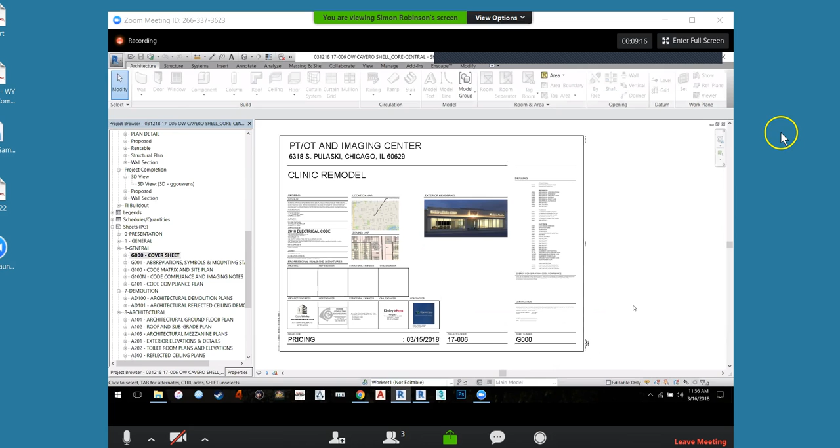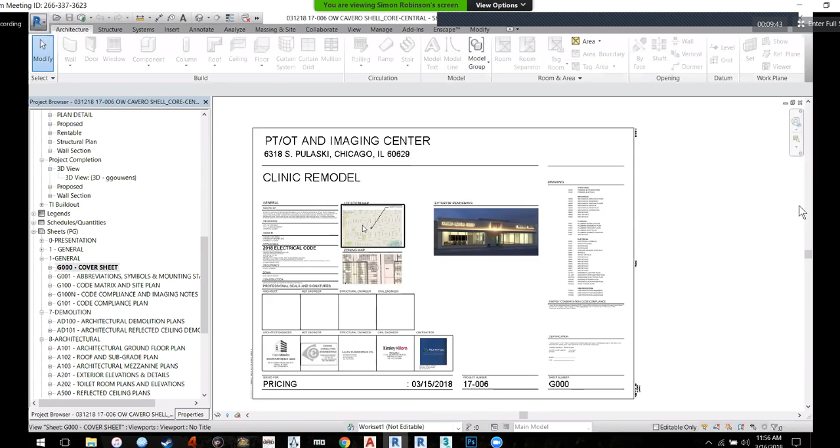We're showing a screen, and we're looking at the future in two senses. First, in healthcare, the world has moved to outpatient care, much closer to where people live. This is an example of a physician building an imaging center and physical therapy center on the south side of Chicago near his offices and patients, rather than having them treated in a hospital. The second sense of the future here is what you see: a conventional set of construction drawings, two-dimensional.

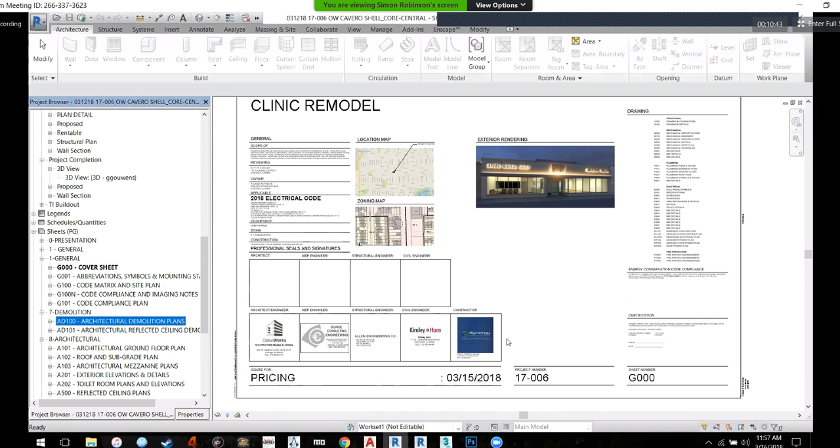Right now we're in a transitional world, between the world I was trained in—drawing in two dimensions, elevations, plans—and now, where technology has made it possible that while the product is two-dimensional, it actually comes from Simon building the building three-dimensionally in a digital world. We are moving toward a future where I'm certain there will be no more construction drawings, but the building will be built directly from the three-dimensional model.

But in the meantime, Simon is building the building in a three-dimensional model, generically called BIM, or Building Information Modeling, because it's not really drawing software—it's a graphic database. In other words, the lines are smart. They have information in them, not just a dumb line. That makes all kinds of possibilities available to us.

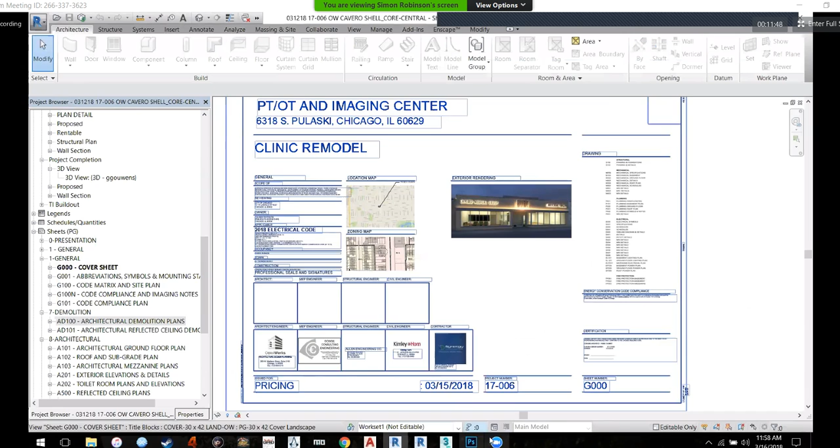We are leaders in what is possible with BIM—in this case, the brand name is Revit, and they own the market. We are thought leaders in what is possible with that. We still have to produce a conventional set of drawings though.

So let's go through some of the pages quickly—just the architectural ones. Let's go right to 101, the floor plan. So the conventional floor plan is the existing building—it's an old liquor store, and we're going to reuse the facade, split down the middle more or less. Big intensive imaging on the upper side, and open space on the bottom for the physical therapy area.

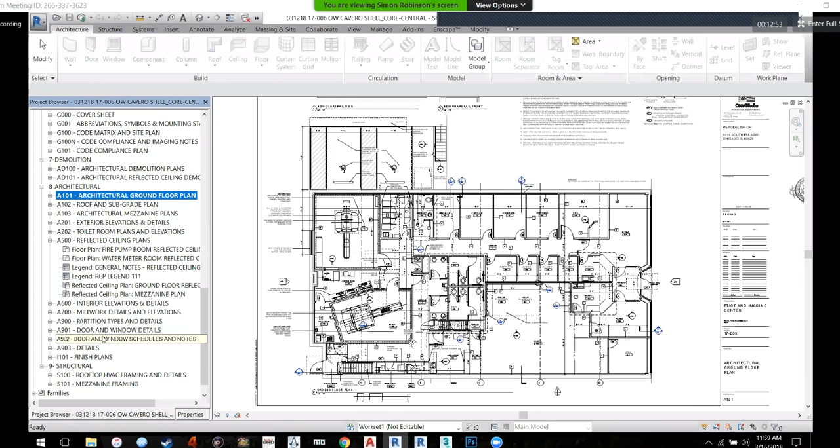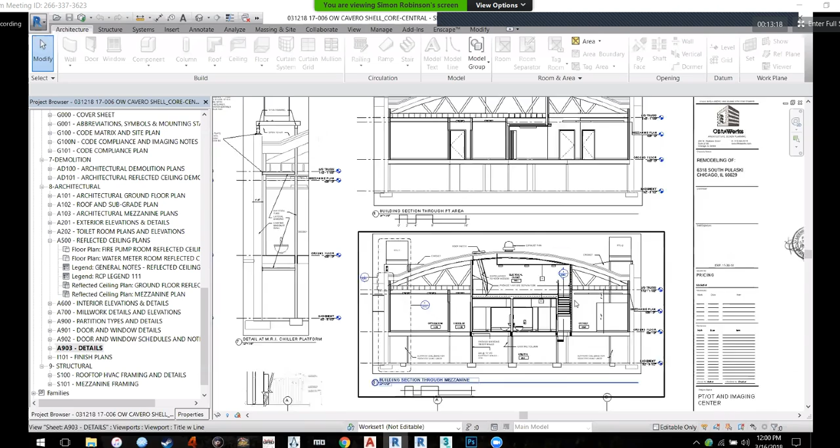Let's go to the sections—903, I believe. Even when I was hand drawing, we did a cross section through the building. What's great about drawing a building in three dimensions is you draw it once, and you can cut a slice anywhere you like, and it gives you accurate information. We're looking at the bottom level, the sub-grade basement, the main floor, and in the barrel roof we created a mezzanine space where we're putting the utilities.

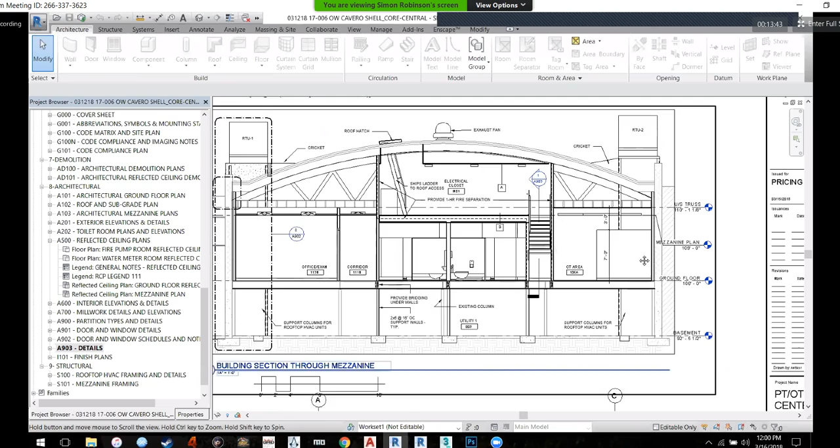Okay, let's go to the elevations. Because it's in three dimensions, I'm able to quickly put a circle around something and zoom right into it—it's already drawn. So let's go to the front elevation. Just conventional elevations. We're putting the mechanical on the rooftop for modern use. Go to the far right, show that roof detail.

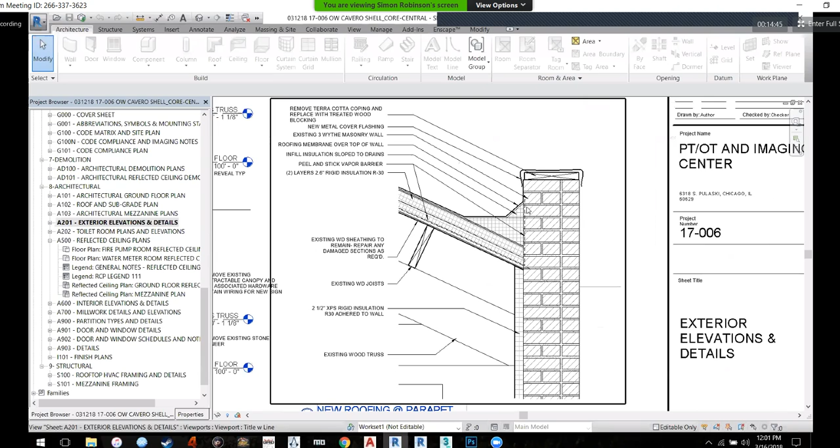So we're still doing details, and this is where we have to manage the new technology, because it gets so detailed it becomes a bit of a black hole. We have to decide how far to take the three-dimensionality of something. So now, Simon, I'd like you to go to the three-dimensional model that these pages are pulled from.

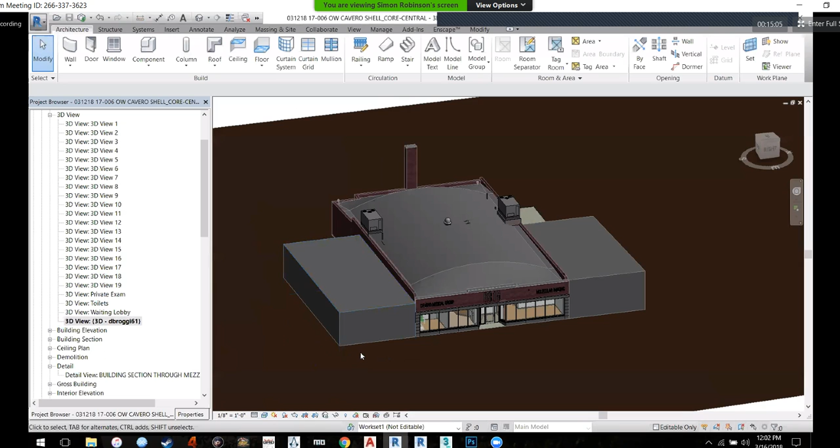Go ahead and talk about it. Well, basically, it's like you said, Frank—these aren't just lines, these are information. So if I select a wall here, this wall right here, it actually has data in it. This is a pretty simple wall right here.

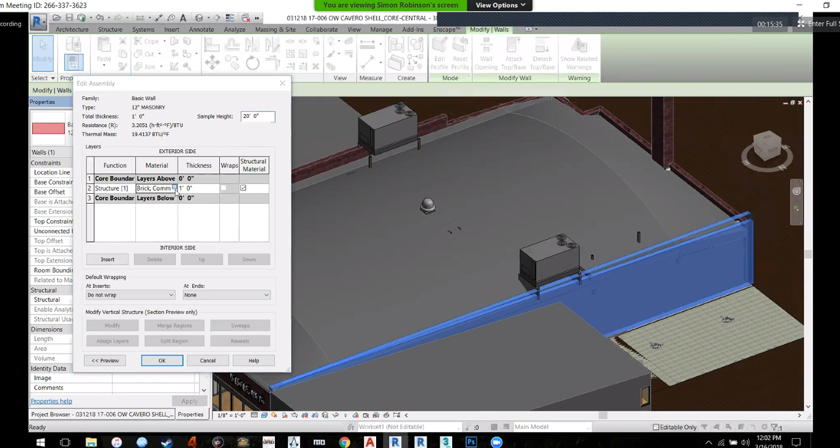However, the program knows that it's brick. All of these materials have attributes related to them—everything from textures for rendering to thermal information. This actually has the R-values and everything stored inside of it. So if you were to do an energy analysis of the model, it would take into account the R-values of the walls, which is pretty cool.

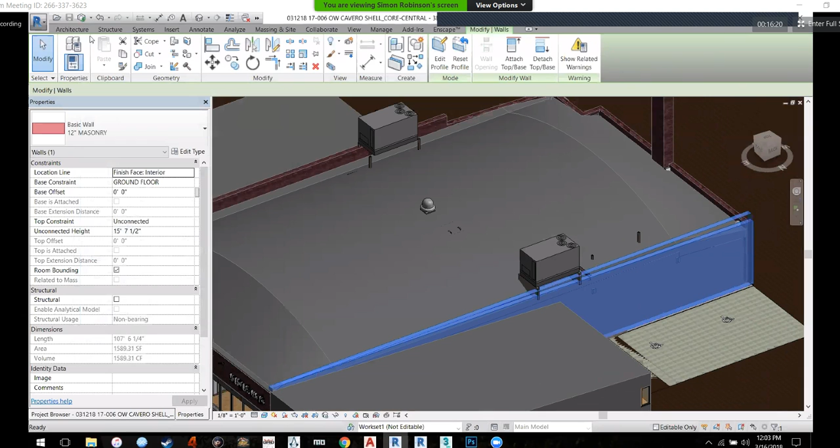So what that basically says is any information I want to assign to a given piece of the model—as long as I assign that information to every piece—it will give it back to me as a whole building value.

With that, for scheduling and basically all your data collection, you could assign data to each component, not just walls but anything from a toilet to a couch. You could put in the model, the manufacturer, even the cost, where you could buy it from, what the website is, and the type mark for tagging it so it knows which schedule it goes into.

Some interesting uses people are putting this to: contractors are using it for precise takeoffs of material, and owners of buildings are using it for managing their buildings. For example, you can click on a pump and it will say this is pump manufactured by X, model number, and they can say, okay, we last serviced it two years ago. Literally anything in the building, you can know something about it.

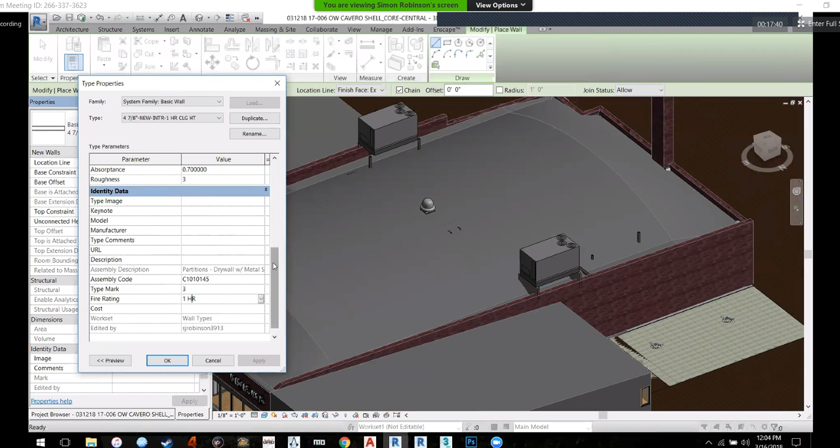Real quick thing about the walls too is that you actually construct them. This is a better example because that was just 12-inch masonry, but with this program you have to be very careful that you do things correctly the first time. Don't just put a wall down and assume it's the correct finish and thickness. If you want to take advantage of all the aspects of the program, you need to incorporate that right here. This is just your basic 1 hour 5-inch wall. Right now it says the structure is a metal stud layer. You can specify whether or not it has insulation inside, and from there you could add the gypsum wall board and the finish. It constructs that wall, and then it reveals the R value and thickness.

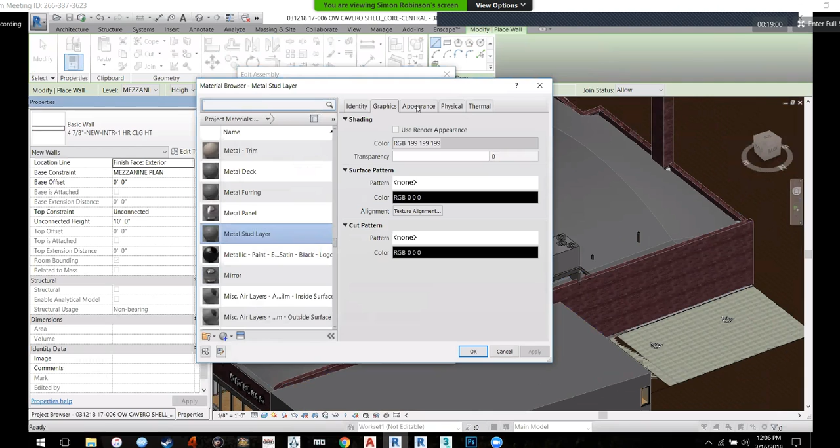Simon, I have a question for you. Yes. I've noticed that as you were able to pick selections, it had a visual. Is that how you assemble a rendering, by picking those visual attributes?

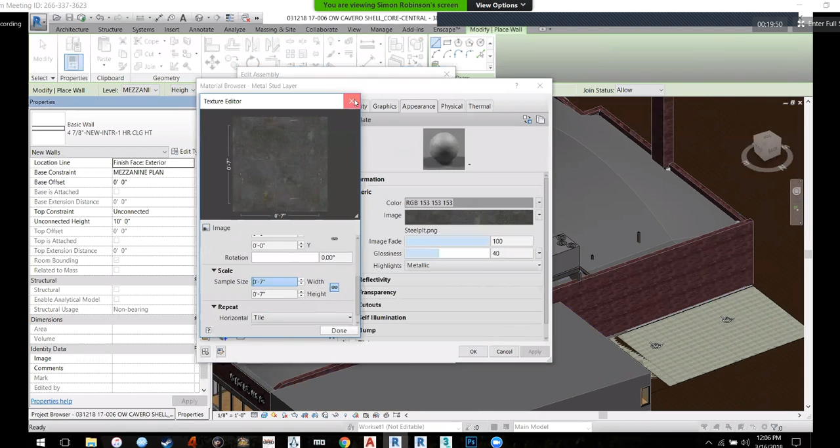Yeah, this is actually what Revit comes with, a library of images. So these will all show up rendered. What I actually do to create custom materials is you could create a new material, or take an existing one, and all you have to do is take any template, a JPEG, a PNG, get them off Google Images or anything, and assign that to it. Then you control the various aspects of it to make it look best. You can change the sample size, make it tiled, and there are a lot of little tweaks you do just to create the best outcome for a rendering.

So, in other words, we're using it for a technical set of documents, but its value is also that we can use it to communicate to people what the exterior or the interior of the space is going to look and feel like. Yeah, exactly.

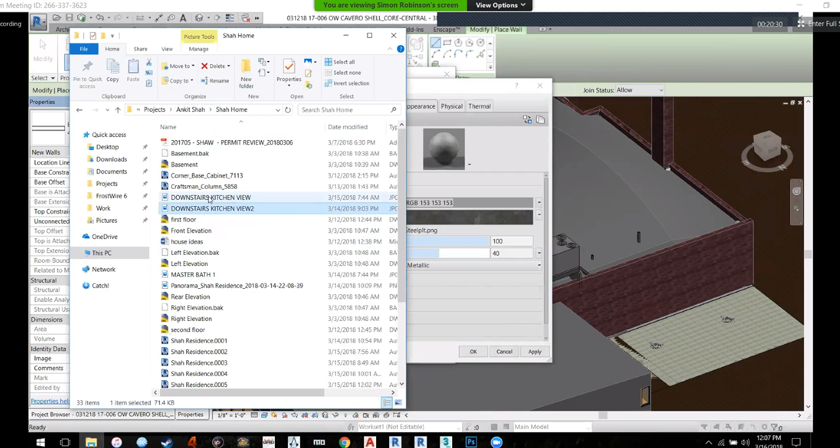I actually, here's one thing I'm doing for a client who wants to see what their house will look like. Which one of these? Oh, that's an old rendering. I think that one's the final one. So this is a house. I've got another one pulled up right here. This is this house I'm rendering for someone who wants to know what their house will look like once it's done being constructed. So this is the kitchen right here, and this is just a night of rendering, tweaking the materials, adding certain components so that they could actually see what it looks like. And you could do the same thing with this medical facility. There's really no limit to what you could do.

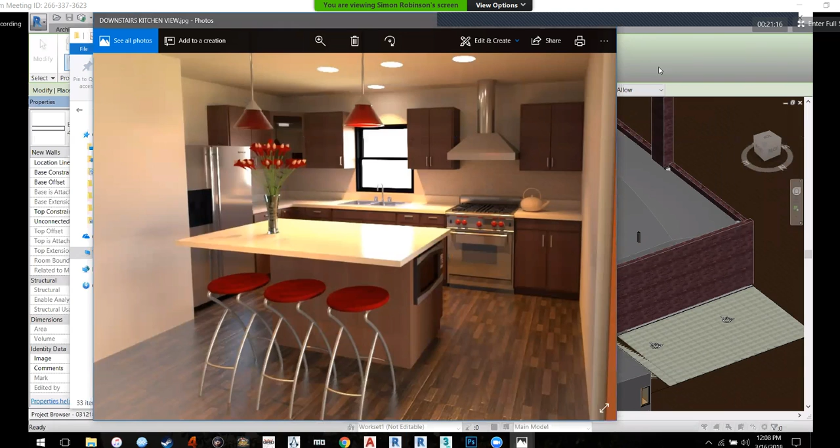So you started out building this in lines, and giving it attributes, and it showed up like that. Yeah, this one they had an architect design it, and for the sake of making it quick, I just took the PDFs, imported them into AutoCAD because AutoCAD can read the lines, and then I took that DWG and imported it into Revit. All you have to do is, let's see, I'm going to first floor... all you have to do is trace over them to create the model. All you've got is a piece of paper, and you can still create a model. Yeah, of course AutoCAD is a little picky.

So on a few projects, I've just had to import the actual raster image or the JPEG and trace over it. But as long as you get the scale right, for projects like this where the dimensions don't have to be to a 1/16 of an inch tolerance, it doesn't really matter. That's a good way to at least get a good visualization of the project.

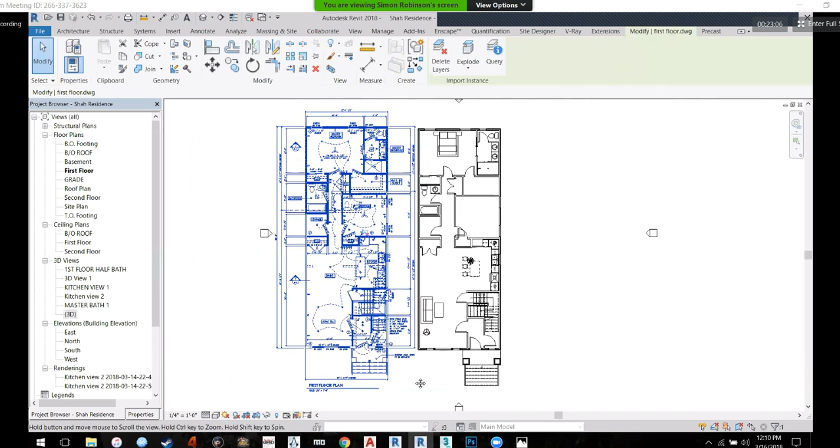So it depends on the project really, whether or not. If I wanted to go to Dr. Cavero's office next week, say, hey Jorge, I want to show you your building, and he thinks I'm going to whip out a roll of plans, but actually I want to have you on a connection to the screen. What can you show up right now?

Actually, I've got something. I've been working with Revit, and it has a few features that, how do you say, there's a bit that's left to be desired. So there are third parties that create certain add-ons that you can work with. This one's called Enscape. I'm using the trial right now. Hopefully I didn't load this beforehand, so it might take a little while.

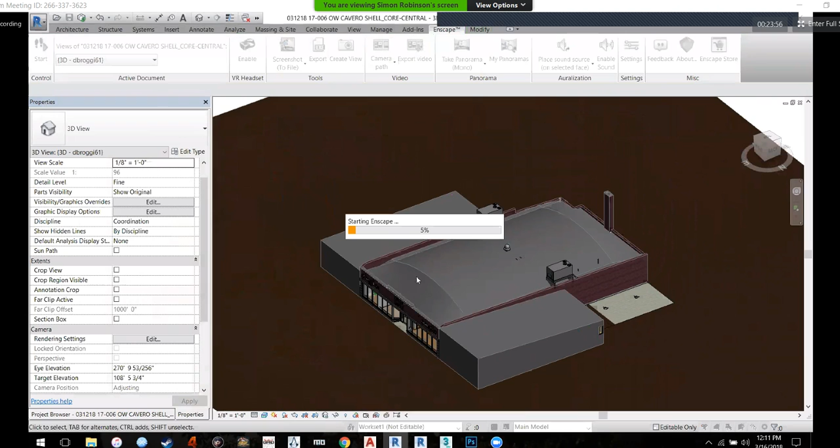Essentially, what Enscape does.

Let's see, alright that's loading right now. Essentially, with these third parties, they add features that make the interactive experience more realistic with Revit. It'll take that building information and you would actually get into the world of virtual reality with this. I don't know if either of you have experienced, like the VR glasses or VR goggles, but you can actually use that with these models. So I'm hoping this will...

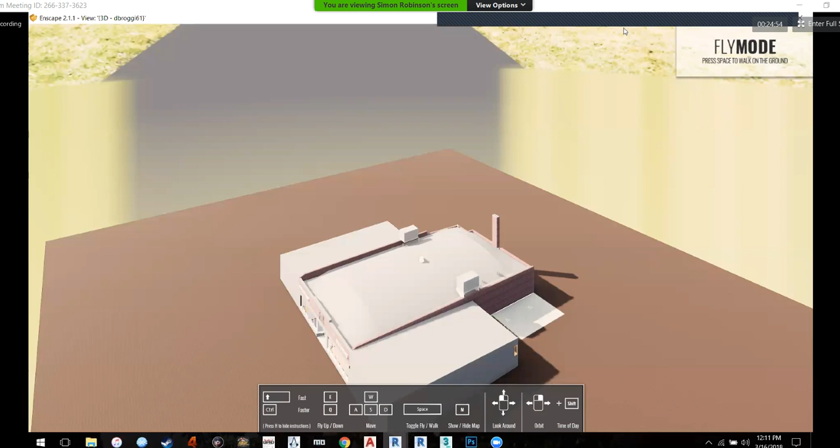Okay yeah, this loaded. So this is through Enscape, and it's a lot like you'll see on Autodesk 360. However, with Enscape it's a lot more realistic. I love this. I think it's, let's see, this one is $45 a month, so I was thinking about getting it actually, if there's enough for me.

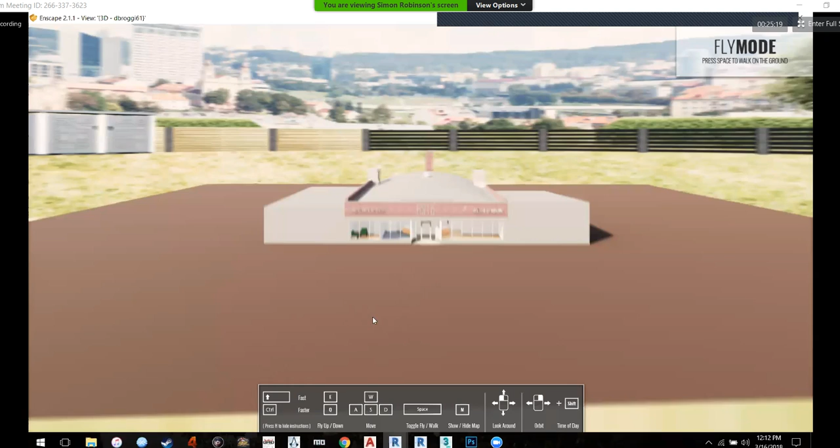With Enscape, this works best with 2 monitors because you have to control it from... there we go. Let me close this other one.

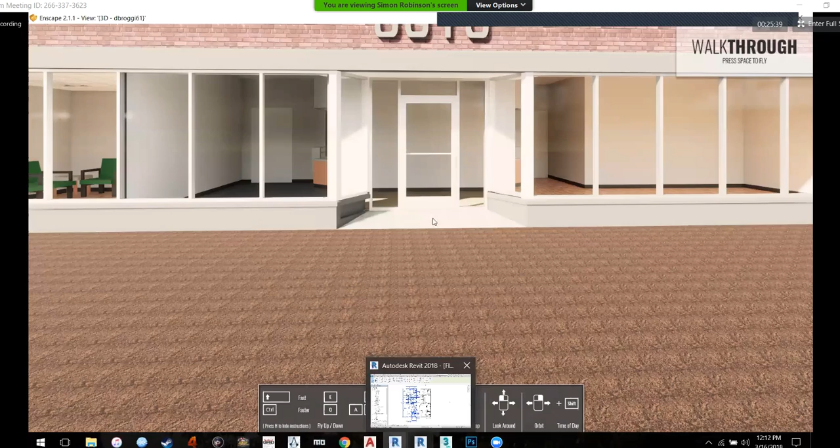Okay, so with Enscape you can even hear—I don't know if you can hear, I'm outside right now so there are birds, but in the program there are actually birds too. So it gives you an auditory experience as well. This takes all the materials and it's almost like a video game.

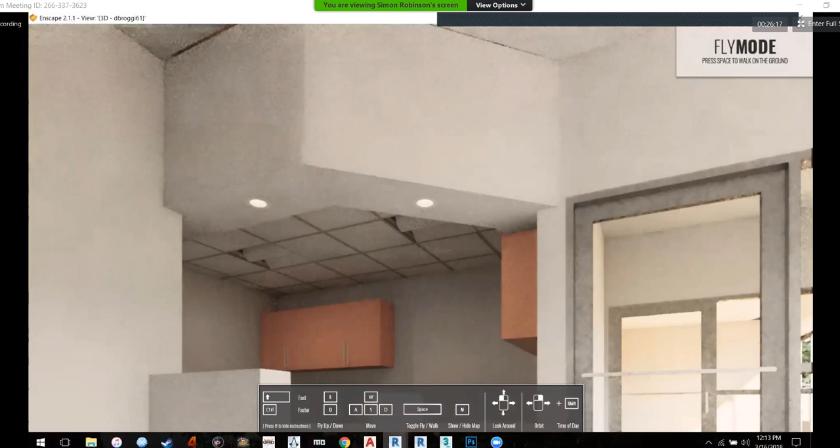And what I like about this is it actually has constraints, so it knows that this is a floor, it knows that's a door. Yeah, I see he's picked up the materials. Yes, which is really nice because Autodesk 360 doesn't pick up any custom materials that you might have, and I use a lot of custom materials because the library is a little limited.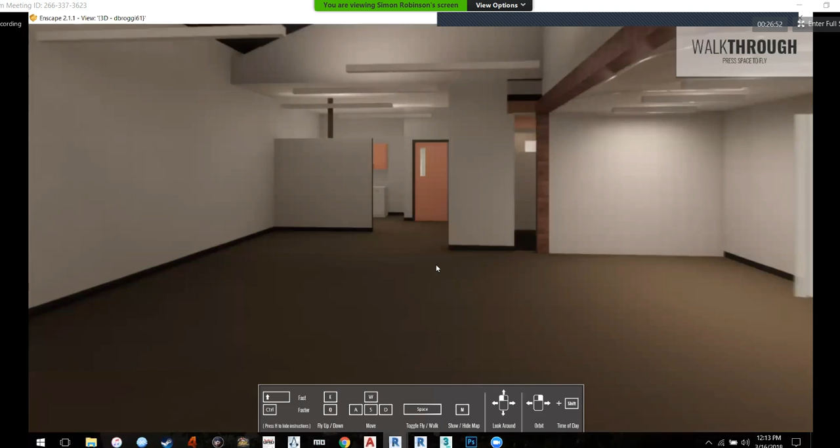Let's see, alright so I believe this is a door. It's not perfect, obviously, but there you go, alright, walk into the PT space. So as you can see, it's actually rendering it as I go along, as realistic as my computer can take.

So if we wanted to add families, objects, like the 2 beds that would be in that corner, that's something we could go to these days. You could go to that manufacturer, download the family, and put it in. That depends entirely on the manufacturer. I have seen a few that provide Revit models, but quite often you have to go through a database, because there are people like you and me who create the models. They say, alright, I have this desk from IKEA right here, I'm going to measure it and model it, and then put it online for people to use.

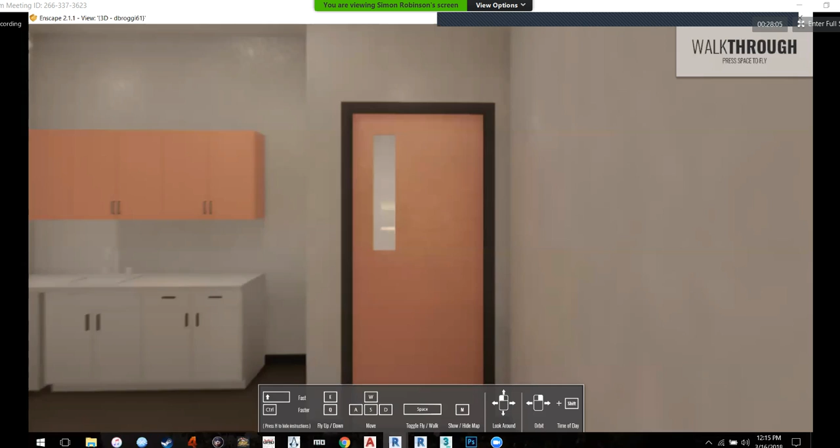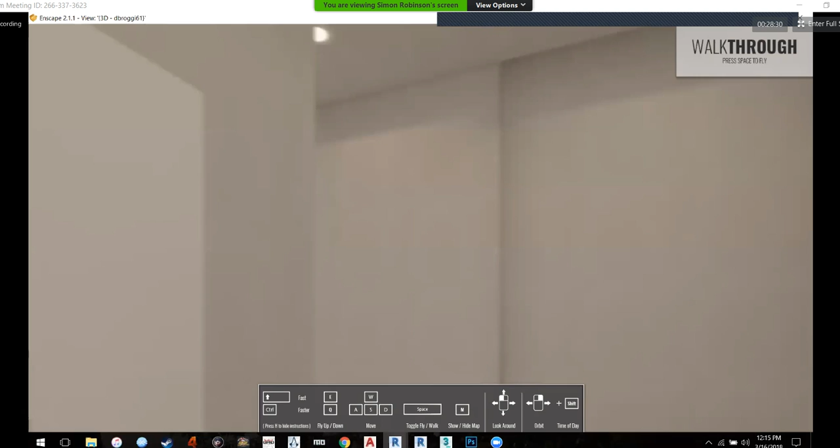So we don't have the imaging equipment in, but now we're in the imaging suite. So the power of this can be, as soon as we can get the imaging machines in there, we can show the nurses and the staff how much room they have to walk around.

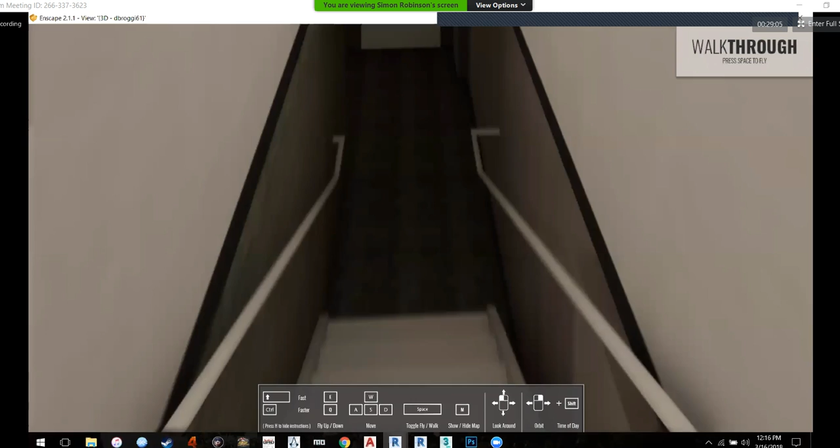Yes, that's a big thing I noticed with this, it's actually got the constraints. So say there's a table right there, it won't let you walk through the table, you have to move around it, so you have a better idea. And what I really like is they actually have the stairs, right, you can actually—stairs. That's why this is an aspect, Enscape's the only one that I find that's really got this down really well.

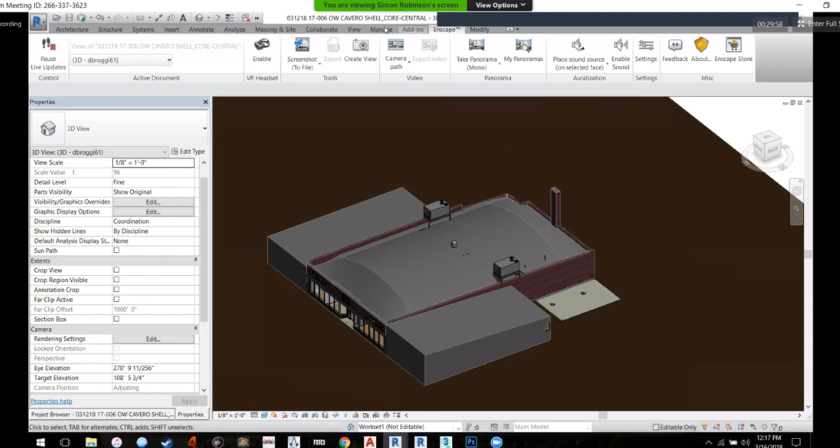So also with this, what you could do is take a panorama. You see there's a stereo option here. So what you do with the stereo option is, say you imported it to your phone and hooked it up to something like Google Cardboard, you put the goggles on your head and look around as if you're actually there. Gotcha. You could take shots and all that. So that's just a feature I really like about the third parties, how they can work with Revit to make it even more interactive.

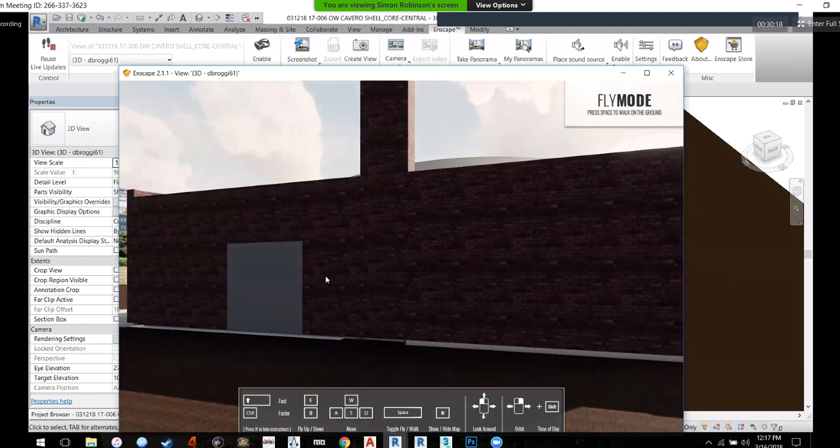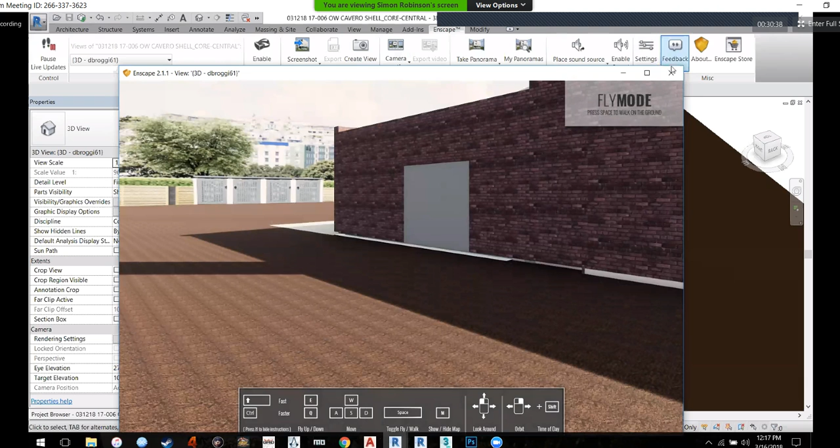What would it take? How much would it take? A lot of time to start populating, particularly the imaging equipment. What do you mean? To put in, even if it was just a generic MRI machine. Oh, would you put it into our Revit model, or would you put it...

Well, one thing is that we have two separate models on this project. This is important to know. One is the architecture, and this other one is our mechanical, electrical, and plumbing. It's a separate Revit model, and they get married together. We aren't able to see it here because we're only working with the architectural model. But in the full model, we can go up above the ceiling and see if a duct is running into a beam, or there's not enough clearance from the ceiling for the lights.

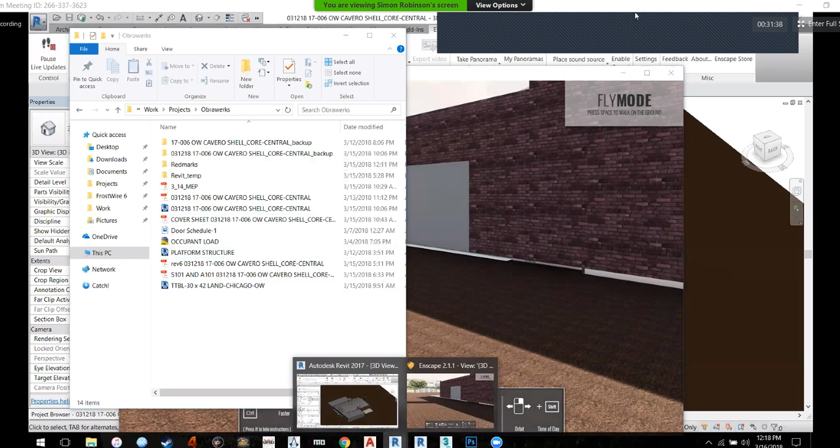So what made me think of that is I know that in the MEP drawings, in the MEP model, we modeled the imaging machine. And I didn't know if we could, not here today in this demonstration, but marry the two models together and then redo the landscape.

Let's see. Right now I'm downloading the MEP model, so I'll just open that up for now. Okay, there it is.

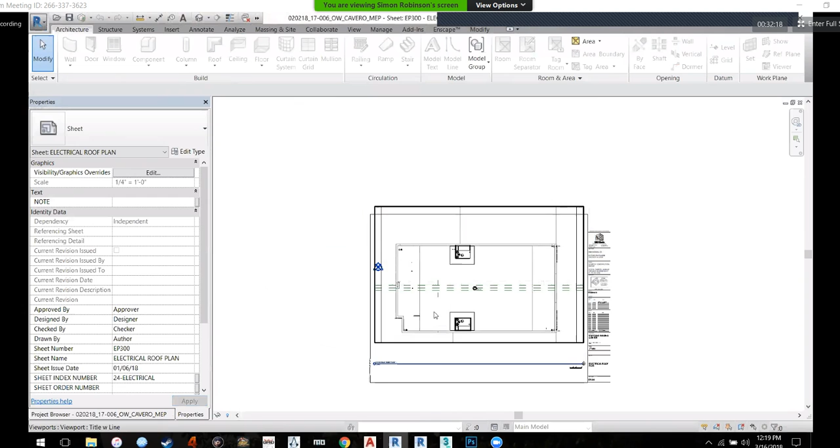Let's see. Here's the MEP model. You could actually do this with the Autodesk 360 even. I could share that too. Picture is in there as well.

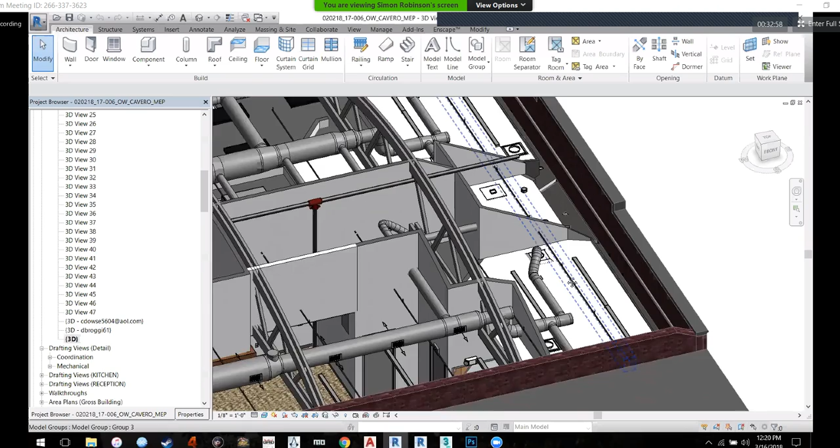Yeah, I haven't looked too much around the MEP model. Can we go inside it? Yeah. In reality, you don't even need Enscape to do something like that. You could just use the A360.

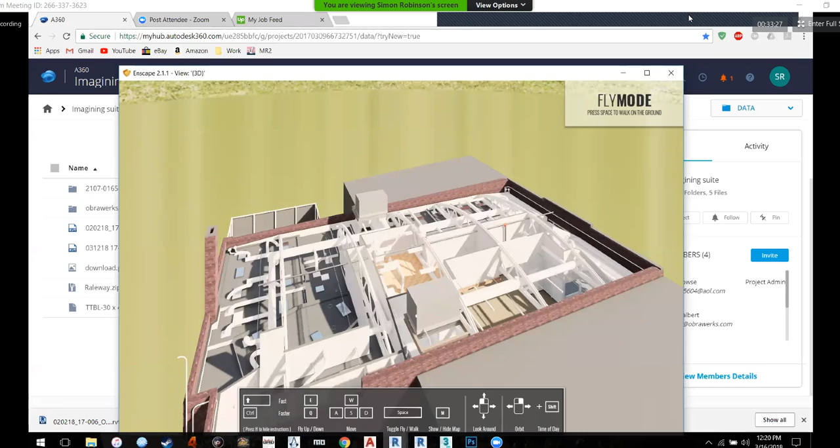Are we in Enscape now, or are we looking? Right now, I'm launching Enscape. Let's give it a shot. This is actually, it's not too expensive, and it has a lot of features that I really like.

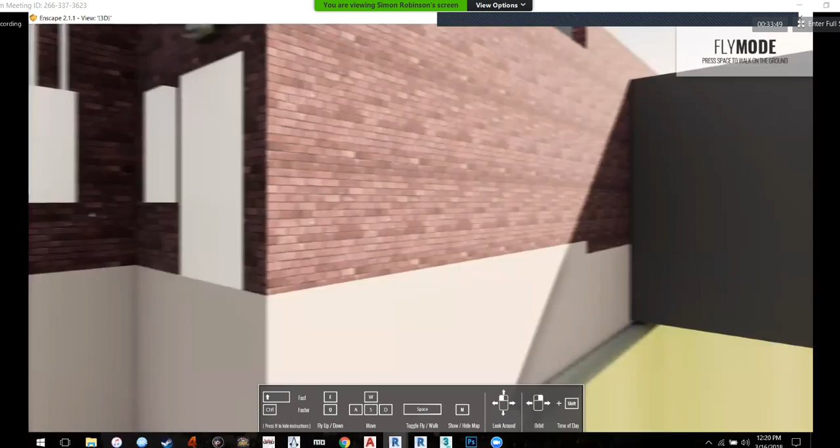Oh, there's no ground. Okay, so I can see the new electrical service on the building, coming in from overhead. We've got our lighting in there.

Let's go towards the imaging rooms. Let's see, I have to orient myself here. Okay, you're outside to the south.

Exit. Okay, that's the PT on the left. Okay, here are the bathrooms. Oh, the bathrooms, okay. Let's go in the bathroom and see what we see.

One thing is, I know I put the flush valves in, and I don't think this one's updated. Okay. Let's see, flush valves in his model, I bet it is.

Let me go through the door. It's okay. Yeah, over there. Okay, emergency light, mirrors.

See, I'm able for the first time to see what fixtures he picked. An ADA comment, by the way, is we got to skinny that down to find a unit that's 4 inches for the hand dryer, but I'll figure that out.

Let's see, do these lights work? Yeah, it looks like the lights are working. Which is pretty cool.

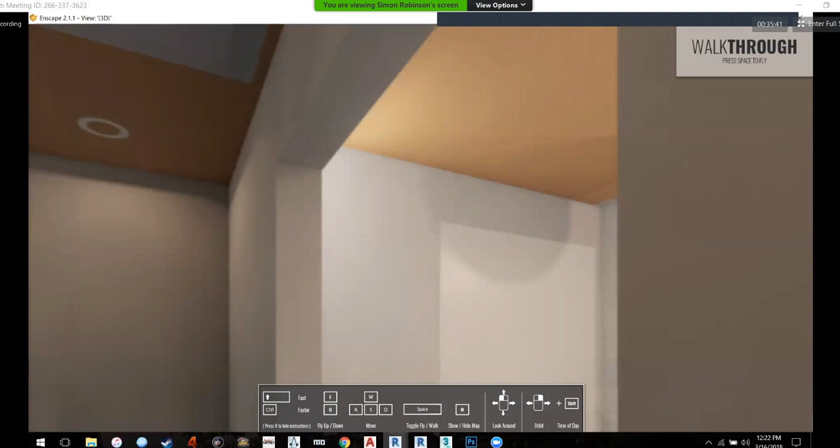Yeah. Okay, let's see before we see an imaging. Alright, so there you go. Okay, this is the control room for the PET CT, I believe. And then if you turn around, look the other way, behind you, that'll be the window for the MRI.

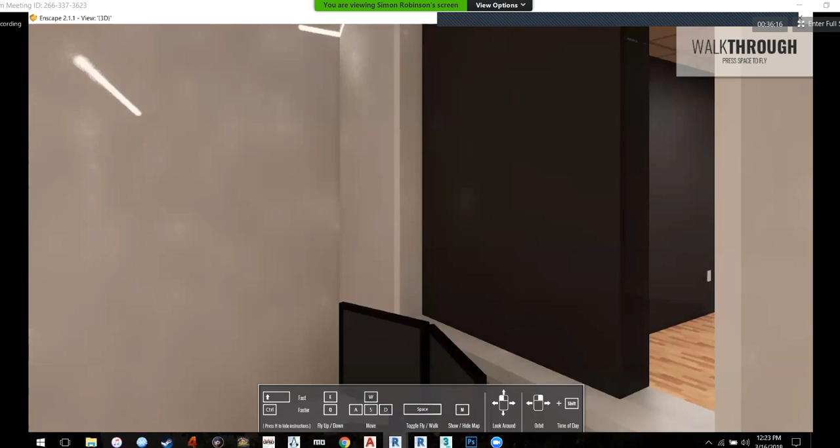Something blocking this window. There's a conflict in where the windows are, he doesn't have a window where you've got a window. Okay. Well, let's go into... There we go.

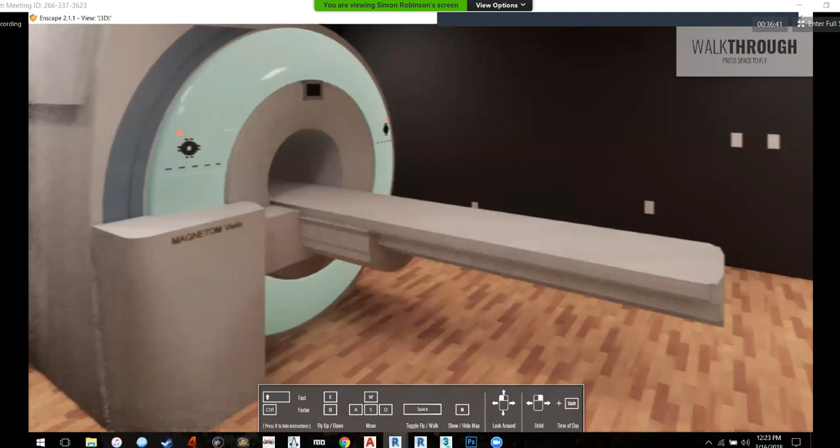Wow, this gives us a ton of information that I wasn't able to see before today. Yeah, I don't know if it really translates on your end, but the virtual feedback gives me a real sense of the space, or the amount of space I have there.

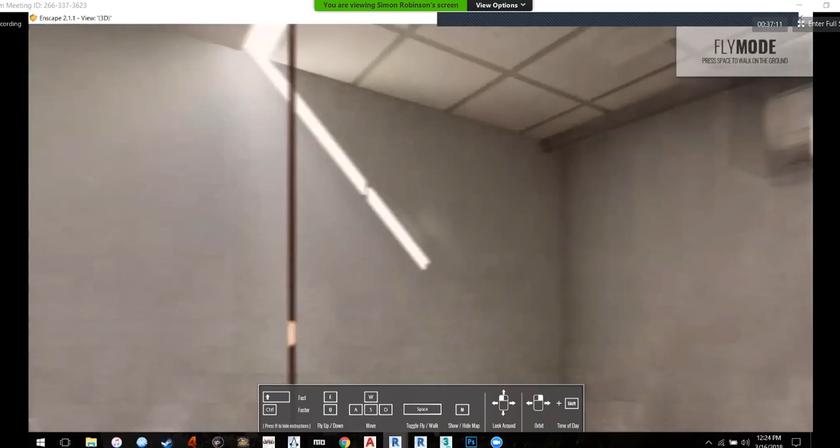Just to pick up. Where did I go? I keep hitting space, which turns the constraints off. His walls are not lined up with your columns or your piping or something. I don't know. Your walls aren't just lined up yet. Yeah.

Well, okay. I know you wanted to see the ducts, and let's see if I can go through the roof. We go in between. Oh, you know what? He didn't have the roof on here on this 3D view. Okay, but you can see the bow trusses.

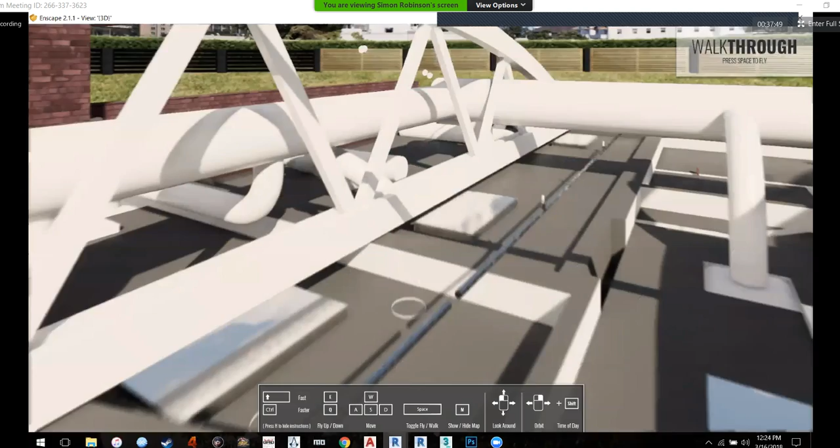Yep. I wonder if I can walk on this roof. Let's see. Okay, yeah. So, one of the other 3D views, I think he just has the roof hidden in this 3D view. Yeah. Okay.

So when we put together this HVAC units we put in, okay, you can see all the little details, all the little conflicts that you might have. Fantastic.

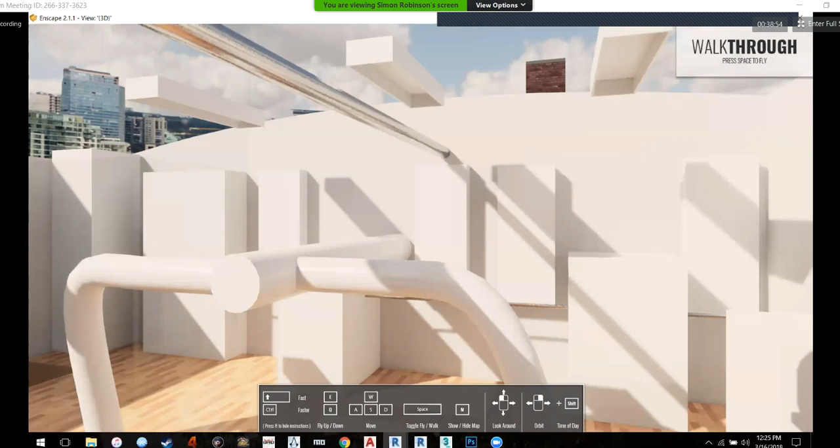What is this? This isn't the mezzanine. The mezzanine. So okay, he's got to clean up his ductwork and get it right. He mentioned to me the only conflict he found was we had some ductwork going through the mezzanine. All right, there it is. Yeah, so he's just got to figure that out.

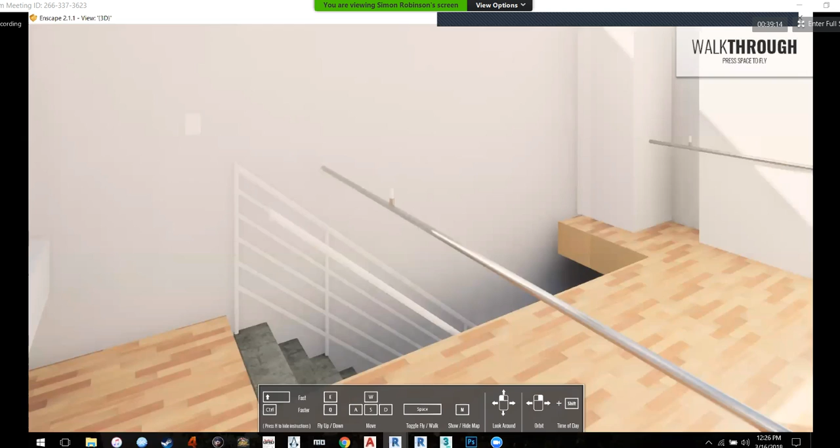Here I was thinking about how to use this to show Dr. Navarro, but what I'm finding out is I can see exactly where we need to clean up some coordination issues.

Yeah, like, yeah, constraints are on. I can't walk through that bar right now. Okay, we just turned them off. There we go.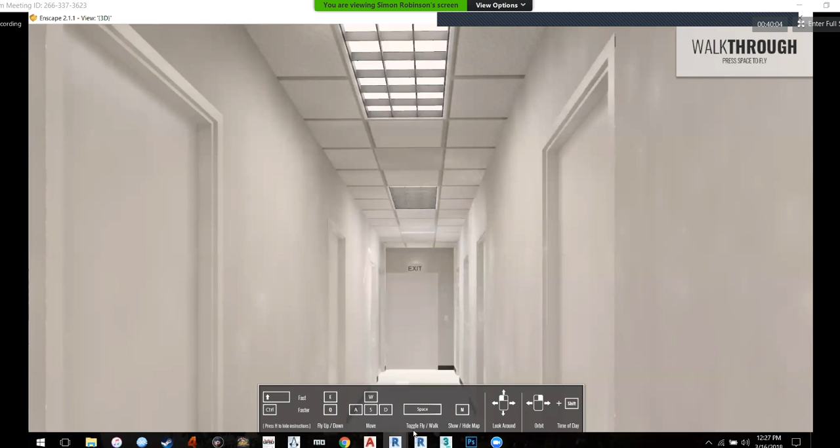I'd really like to figure out the walkthroughs, because I want to be able to record this walkthrough. But it's a bit harder and more intensive on my computer to control. With Revit itself, it does have walkthroughs, however it doesn't recognize constraints like this does.

So if I go upstairs, I have to actually input the height. Revit walks right through the doors and walls. Revit will walk through the walls.

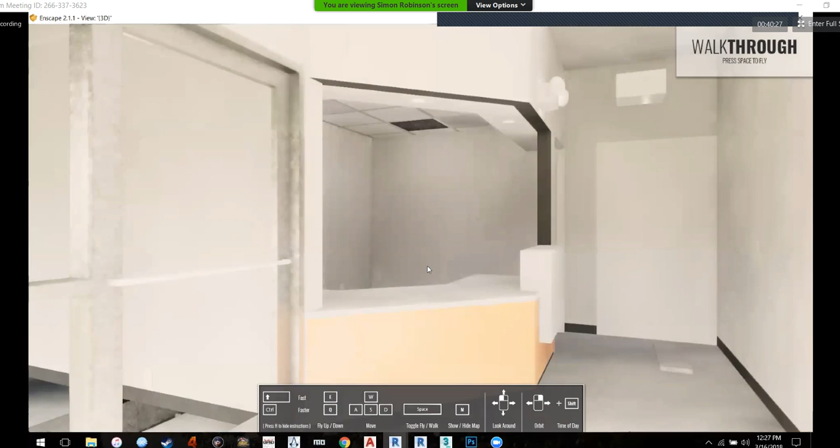This actually recognizes it. Hold on right here. This is the imaging window. I want to look at this for a second. I turn around to the right. Please. All the way, or?

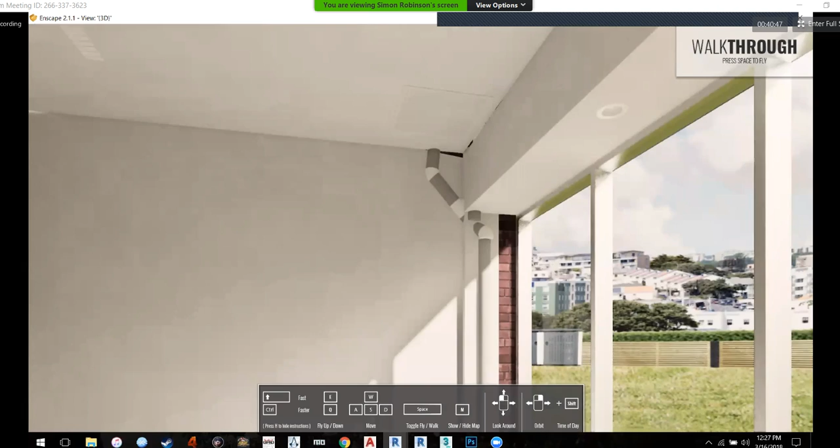You've got a roof leader to deal with there, and I don't know what the other thing is. But that'll be field coordinated.

I think a lot of this is because this is just the MEP model, the architecture's not in there. We put it together. Yeah, because it looks like there's no finished floor, it's just a slab.

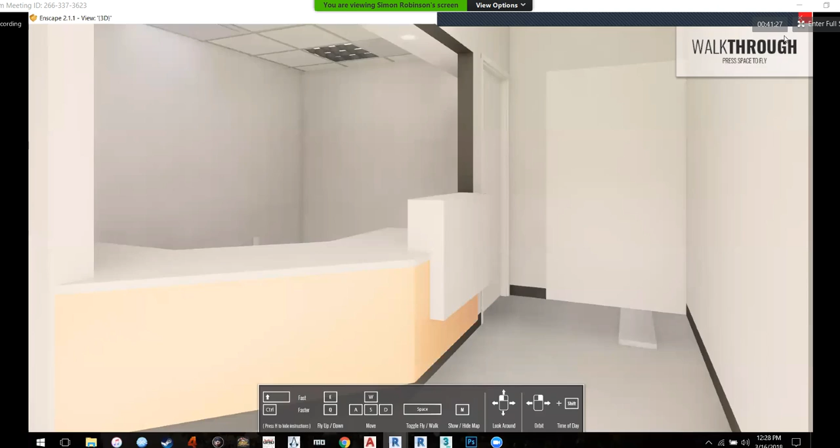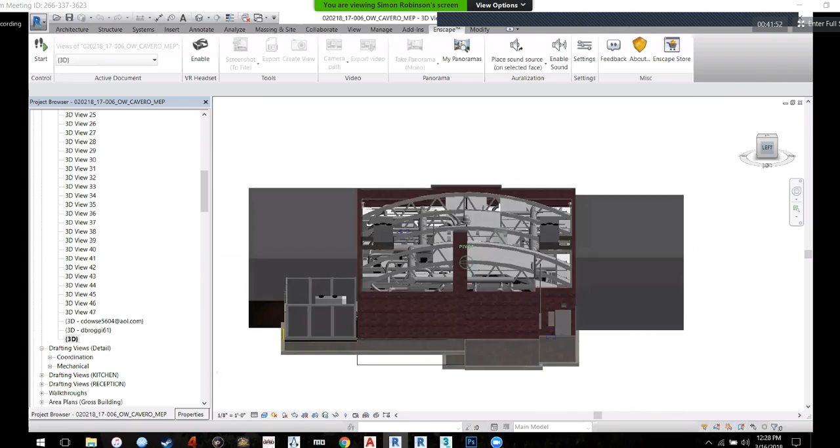All right, well, I think it gives an idea of what's possible. You use it mainly for rendering, for the most part, yes. Just because I don't have an architect's license, I can't exactly take on full projects myself. So a lot of what I find is people have an architect who designed it, but they want to see what it looks like. That's where I come in.

Okay, well, is there anything else you want to show us? There are more properties, like the parametrics. Or any of your other projects? I think they're mostly all renderings. The one thing I didn't go into is the schedules here.

I had a bit of a conflict going into this, just because some things aren't exactly connected. But with the schedules, this is what I was talking about earlier, where you have to be careful as to exactly what you put into the model. If you're going to do everything out of Revit, everything's going to be tied together.

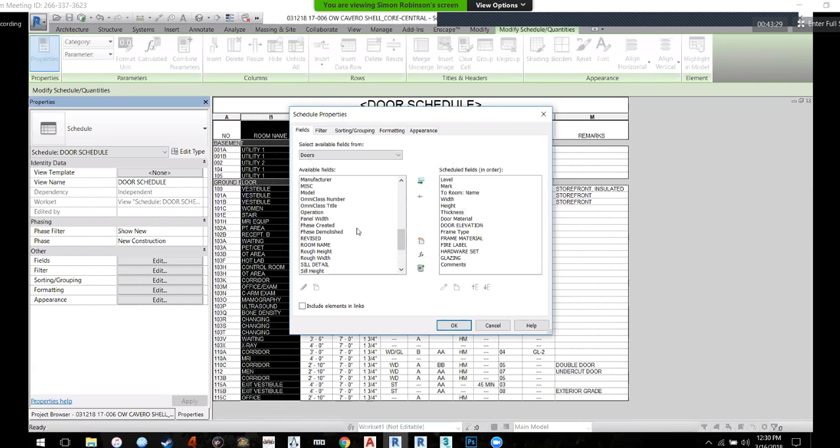Every single door you put in, you have to make sure that you have specified that. So we have the door schedule here. You have the material, and this one actually mentions whether or not it's glass. You can choose, if I go into properties here, you could throw in any of these details - the type, comments, the model, cost, all of that. You could throw that all into here, and if you go back to a single door...

Let's see. I can hear that bird in the background echoing.

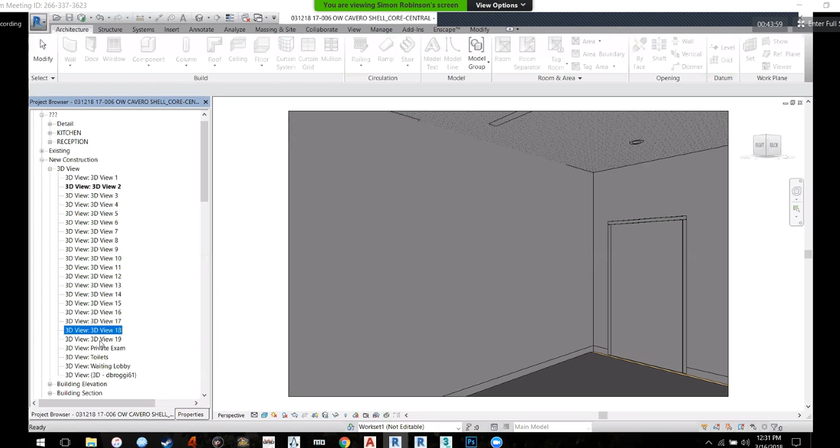Okay, there we go. If I choose a door - so right now I've got this door right here - what I could do is choose that door. I could choose how thick it is, the height and the width. You could choose the rough openings.

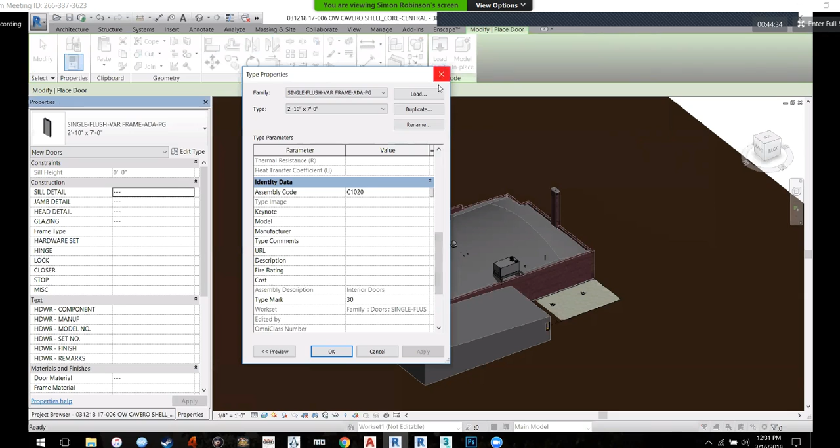Type mark, which is going to be the door tag - all of that, like I said before, all of that information is going to go into that schedule that I had referred to earlier. And if I wanted to...

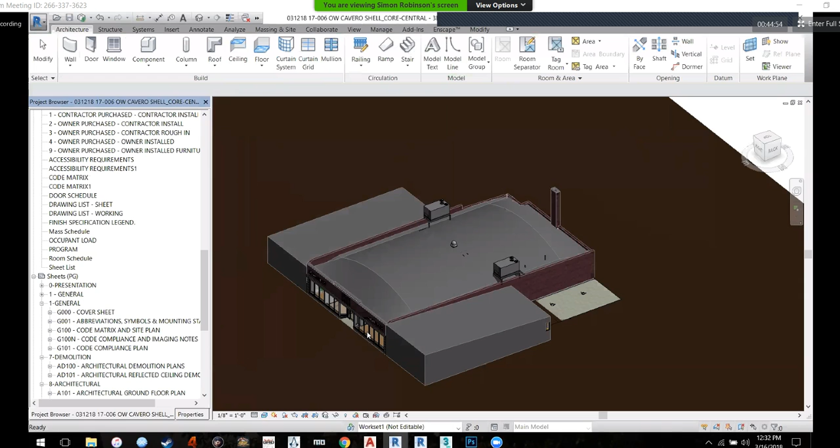That's basically the only other thing I wanted to point out, where the schedule is. You can't just place a door into the model and forget about it, but if you want to create schedules, if you want to get an accurate model, you have to be sure to input the information that you want for the contractors. And I think that's pretty much it.

Okay, here's what I'd like to do. I'll be sending you more markups. We're going to submit for permit next week, assuming our structural guy's done. And then I'd like to work on...

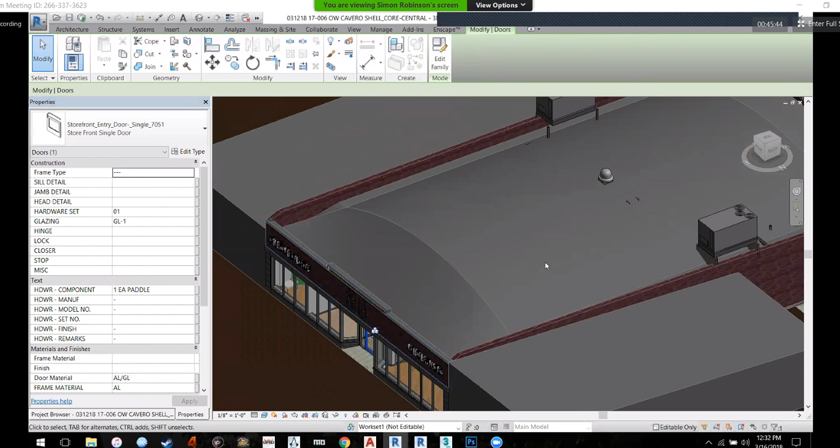Actually, you've uploaded this model to the mechanical engineer, right, Chris? Yeah, I did. The central one I'm working on. Yep, yeah, so I know he's working on a lot of the conflicts that we see here right now. Then, once he's done that, I'd like to come back and populate some furniture and equipment.

But I'd like to get - priority one is let's get the two-dimensional set ready for permit next week. Part two is clean up the model with MEP coordination, and then step three will be, once we're there, let's populate it with equipment, FF&E.

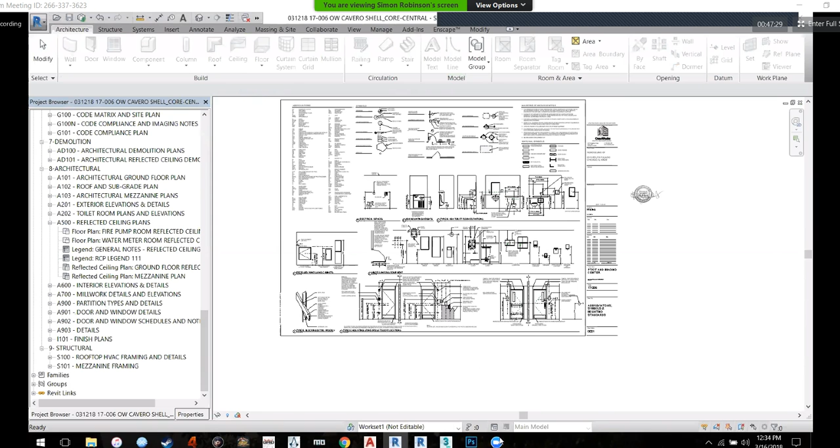So this gives me a great idea of where we are. Thanks very much, Simon. Yep, no problem. All right, and I'll be sending you some more markups of that. Okay, thank you, Simon. Yep, nice meeting you. Nice meeting you.